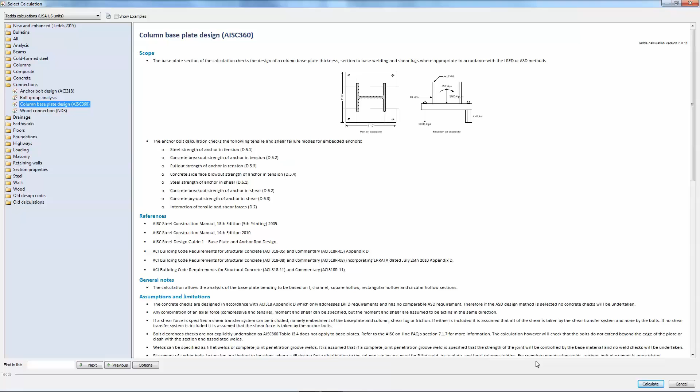Once you start the module, your output page will start in the background, then you will be presented with a series of interfaces. Each one of these works like a book, top to bottom and left to right. You will also notice a parametric sketch on the top of the interface that will continue to update as you move through the calculation. So starting with the geometry, let's start with the column section size of 12 by 35.

You can select Size Base Plate to set the initial dimensions of the base plate to be 3 inches from each side of the column you've selected, rounded up to the nearest inch to accommodate the anchor bolts, or you can choose to skip this step and enter the size yourself. Next, select which axis you would like your moment to be applied to.

Even though the base plate now has a preliminary size of 19 inches by 13 inches based on the column section, we're going to modify this to be a more common size. You can change the dimensions by using the arrows to the right or by simply typing in the input box.

Moving along to the weld details, you can select a fillet weld or a complete joint penetration groove weld. Sticking with the more common fillet weld, you can then enter in an electrode classification and a flange and web weld length.

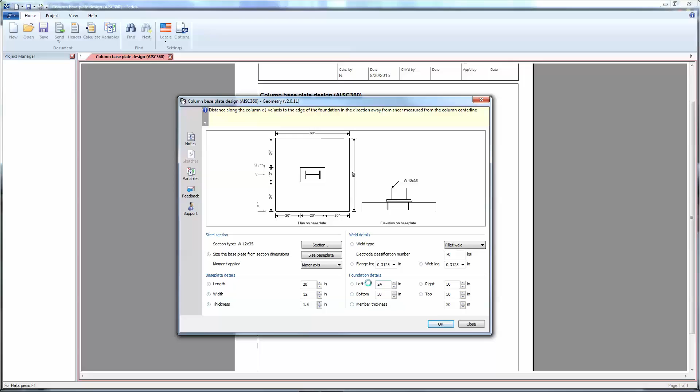Lastly, the foundation details will need to be entered. We will assume we are working with a 4 foot by 4 foot spread footing that is 2 foot thick. Notice that you can simply type in any unit into the input field and it will be converted to the specific unit being required in the calculation. This can be very handy if you need to switch back and forth between metric and imperial.

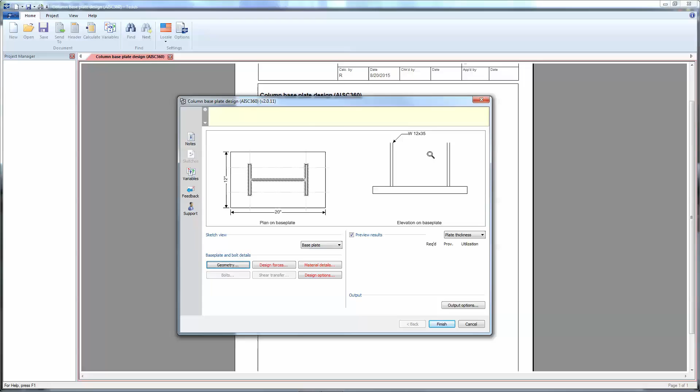You will notice that our sketch is updated with all of the information we've just input. You can pan around and zoom in and out of the sketch using the scroll wheel on your mouse. Next are the design forces. Note that these should be ultimate loads that you may have calculated using one of our other calculations, a set of hand calculations, or from another analysis tool.

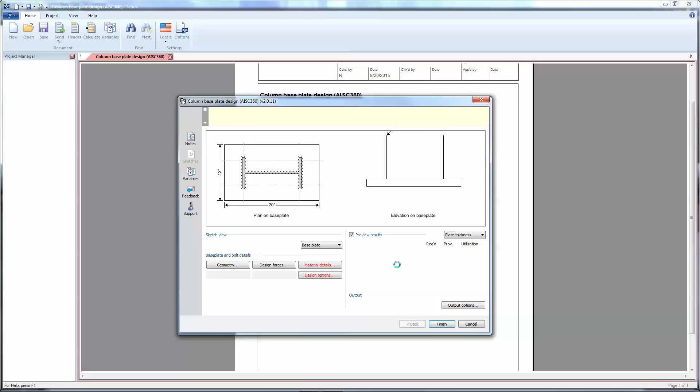Notice once you enter in a shear force, you will then have to select your shear transfer type: friction, bolt shear, shear lug, or base plate embedment. For this example, we are going to use a shear lug. In the Material Details menu, we will leave these as the default values. However, if you are not sure where these values came from or what the appropriate inputs include, you can simply hover over the information bubble to get the code excerpt.

Now on to the anchor bolt details. First, you can select from a variety of cast-in-place options like headed end, hooked end, and headed stud. But don't miss the fact that you can also select proprietary bolts. If this option is selected, you can then go into the bolt details, select which type of post-installed anchorage you would like to use, then enter in all the variables associated with this bolt. These come from the ICC reports and should be published by any bolt manufacturer.

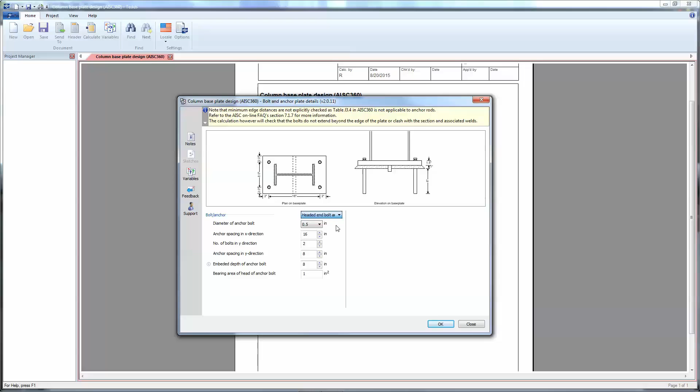For this example though, we are going to stick with four 1 1/8 inch diameter headed end bolts with a 16 by 6 spacing, embedded 10 inches, and with a head bearing area of 1 inch squared.

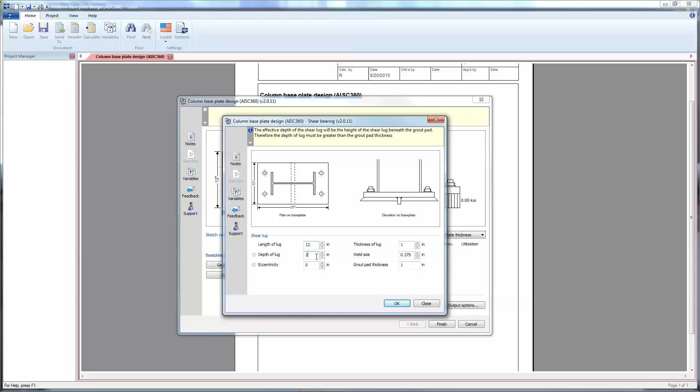Next, we will need to enter in the information regarding our shear transfer mechanism. We're going to assume the length of the lug runs the entire width of the plate and is embedded 4 inches with 0 eccentricity. We will leave the thickness of the lug to be 1 inch, the weld size is 3/8, and the grout pad thickness to be 1 inch.

Finally, you will need to designate your design options. Here we will stick with LRFD and all of the latest design codes, but we'll change the supplementary reinforcement factor to 1.2 since we will likely be using a number 4 bar or greater in the footing between the anchor and the edge. Notice you have the option to include a built-up grout pad, whether or not the bolt has a constant stiffness over the full length of the embedded section, and if you only want to see the output for the most critical shear breakout.

This calculation will default to the US steel sections for the column size. However, if you happen to be working with a foreign section, or possibly even a historical section, you would need to set this design option first, then go back and select the appropriate column size.

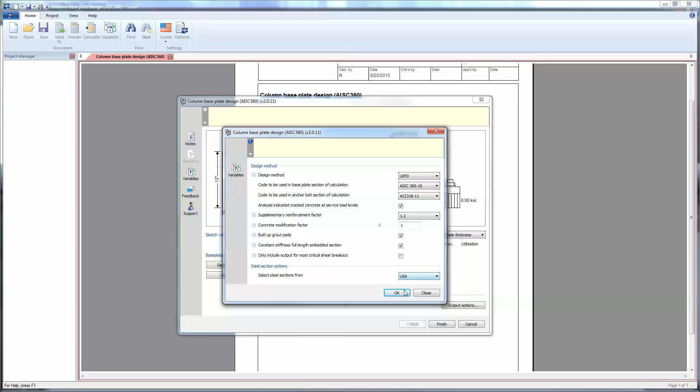The results are organized into 3 sections: plate thickness, welds, and shear transfer. Simply use the gray selection button at the top of the results view to toggle between the 3. However, if the combination of your axial load and moment throws the bolts into tension, a 4th section will be added to go through the Appendix D checks as well.

Lastly, you need to select your output options. Here you have the ability to change the title of your calculation to something more meaningful for your project. You also have the option to select a full output or a summary of this calculation. Depending on your region and who will ultimately be reviewing these calculations, this may vary. However, it is very simple to switch back and forth as needed. You can also select which graphics you'd like to include within the output.

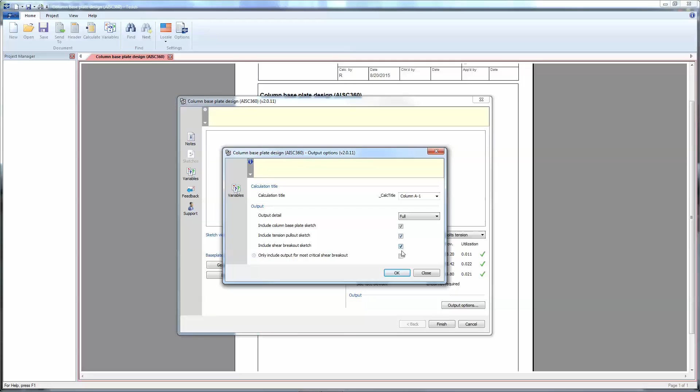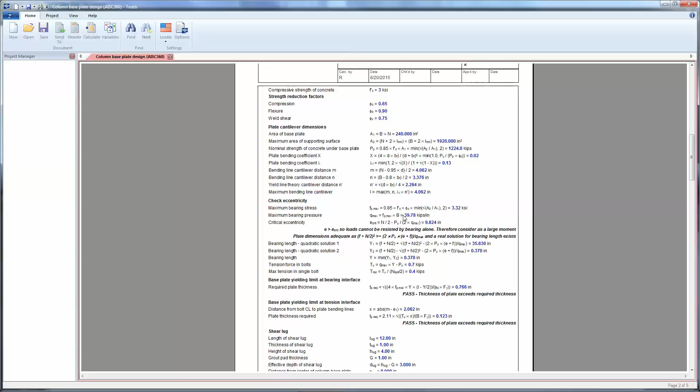Once you select Finish, you will get a line-by-line output going through each of the calculations included in the design. Every variable will be defined, each equation written out, and every code reference provided. This eliminates that black box feel entirely. Now, if something needs to be changed within the calculation, simply click on the Calculate button and the same series of interfaces will appear. Make whatever changes are necessary to update your calculation and hit Finish. The output will automatically be updated.